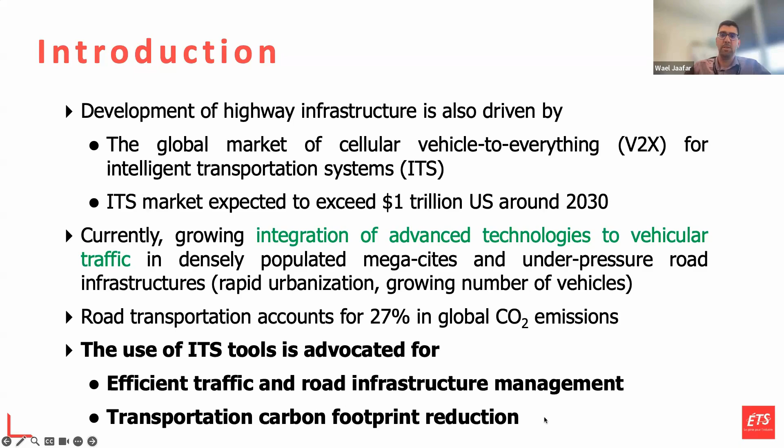And of course, we have this problem: road transportation accounts for 27% in global CO2 emissions. So the use of these ITS tools is really important, and it has to look to optimize traffic and road infrastructure management, and of course, we want to reduce the carbon footprint. So to give you an idea about how these things have been developing.

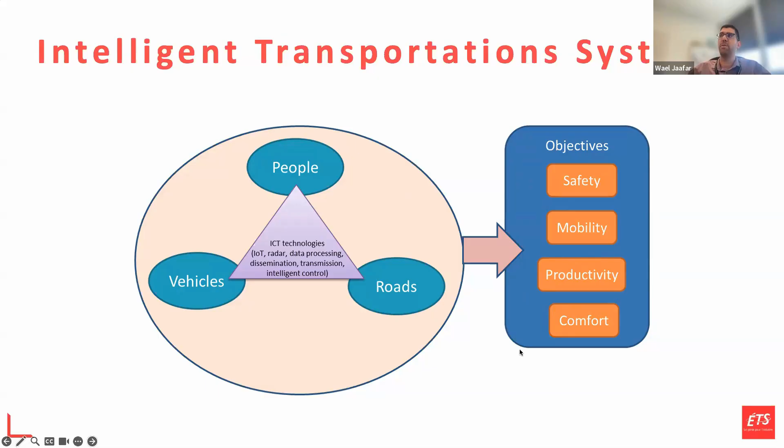At first, we have this intelligent transportation system that has been looking into people, vehicles, and roads, and how this all converges together through technology. So now we have sensors, IoT, radar, data processing that can even be on board, transmission of information in real time, and intelligent control. And usually the objectives we were looking at with ITS are safety, mobility, productivity, and comfort. These are the four objectives we want to achieve. But of course, we cannot achieve them all at once.

For example, in urban areas you have one advantage: you might have cellular infrastructure, which allows V2X communication. You have cellular base stations and roadside units that are very helpful. And in urban areas, the most important thing is productivity. We want our trucks, when they go from point A to point B, to be as fast and eco-friendly as possible, consuming less gas, etc. If it's an electric car, we want to take the shortest road in order to save energy for the next trip. So productivity is the main thing.

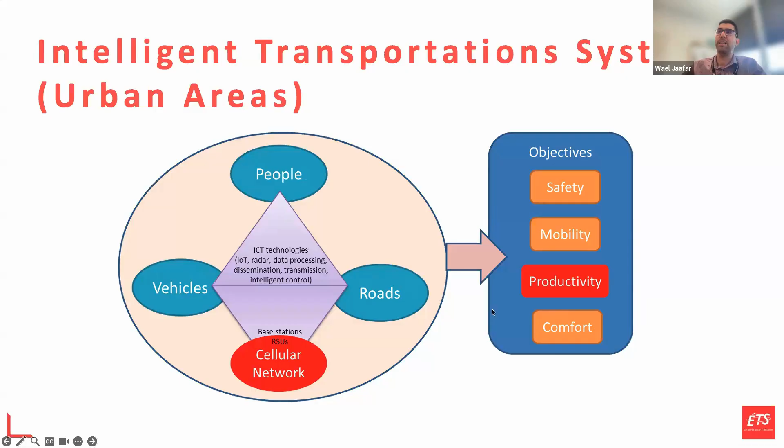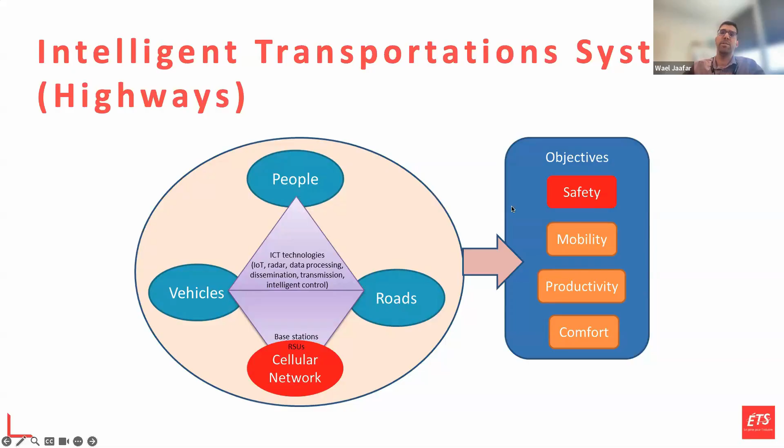But if you go outside these big centers onto highways, it changes, because now it's not about productivity, it's mainly about safety. Of course, the other ones are still there, but safety comes first. Why? Because on highways, cars run very fast, and any alteration, any change in the highway can be problematic and can jeopardize the whole trip. So this is the difference between these two.

In transcontinental highways, to be specific, we have other problems. The cellular network that we mentioned is not there, because many segments of the highways are not covered by any network. Think of mountain areas, of areas between cities. For example, going from Montreal to Ottawa, at some point in your trip you will lose all cellular connectivity. And it's funny, how come you're traveling from one city to another and in the middle there is no coverage, we have coverage holes. So it's really a big problem, and such problems cannot allow sustainable intelligent transportation services.

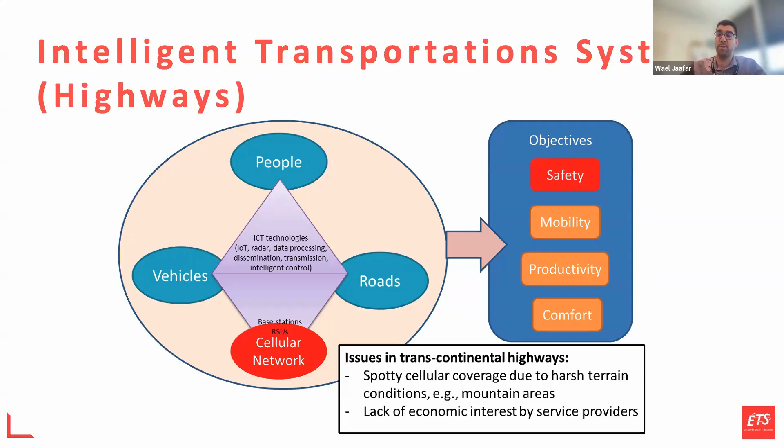And of course, why is it like that? Simply because between Montreal and Ottawa, there is no one living there. Or if there is someone living there, the number is so small that it's not revenue generating for operators, so they won't deploy infrastructure there. That's one part of this connectivity problem. The other thing is about the development of ITS.

Level 2 is partial automation, meaning that you still need a driver, but you have some automation. For example, when you are on a highway, the automation will keep you in your lane. It won't let you steer to the right or left if you did not, for example, put on your turn signal saying you will change lanes.

Or actually, if the sensors or the cameras see cars next to you in your dead angle, it won't let you do it again. So it's partial automation. And then you have level 3, which is conditional automation, which is eyes off, meaning that the driver is not always mandatory for driving.

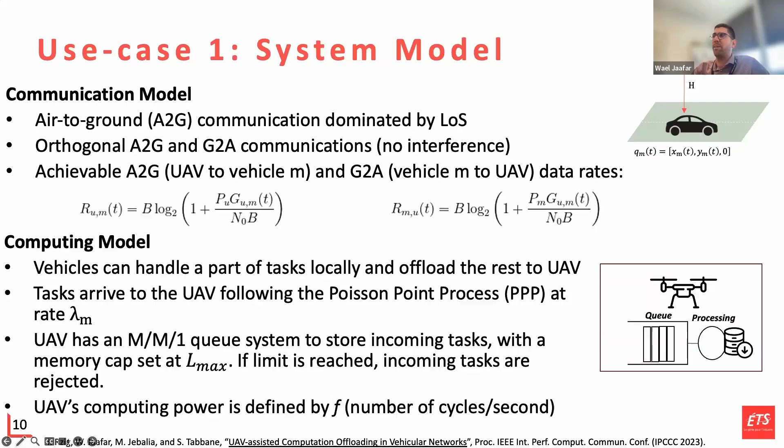Then we looked into the energy consumption. Of course, it's important because a drone has very limited energy. For energy consumption, you have some energy for flying. When you fly the UAV, actually you consume a lot. And then you have task processing. When you process a task, you will also use some energy. There is a third one that I did not show here, which is the communication. Once I'm giving back the feedback, I will transmit something. But usually this transmission is 1% to 10% of what is used for flying and processing. So usually you will just neglect it because it's less than 10%. So in this case, we just accounted for these two.

And in parallel to that, you have to look at the delay. So why are we looking at the delay? Because if I want to offload the task and execute it, I have to make sure that I'm respecting the quality of service requirement that has been given to me. So in this case, we will calculate the delay between the vehicle, the CAV, and the drone. Here, the formula is not like the basic Shannon formula, because since both are moving, the channel is changing. So to have a better idea about the delay, you have to account for this change, since time is discrete here, from one time slot to another.

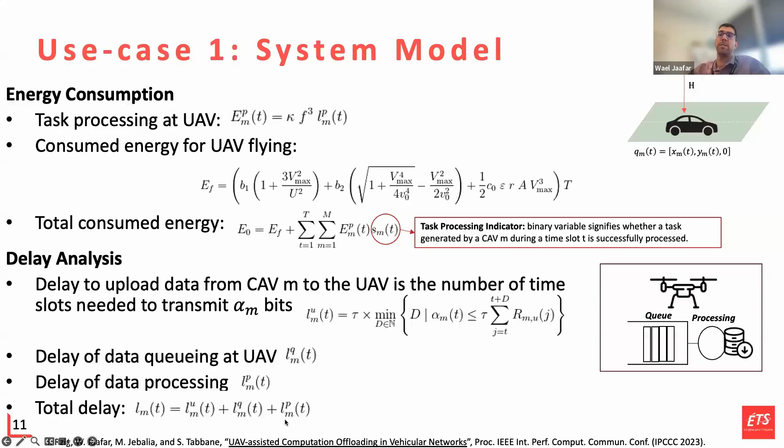And then, of course, you might have queuing delay. We will also account for data processing delay. And the total delay will look as a summation of the three: communication, queuing, and processing. This is the main delay expression here.

So we formulate the problem. Here, the problem is to maximize task offloading success at the drone. So whenever I'm getting a task, I want to make sure that I'm satisfying the maximum number of the tasks I'm receiving. Of course, the constraint will be related to the quality of service. So task offloading delay is actually the tolerated time end-to-end, including communication and processing. Of course, energy consumption also has to be respected based on the battery capacity that you have in the drone.

And what we did here is that, since I told you we have our drone that once it's launched, it will just target a segment in the highway and make a trajectory of come and go all the time, then we have to limit the locations of flying the drone. So in the optimization variables, we'll have the drone launch location and the flying direction. And of course, we have to account for successful tasks.

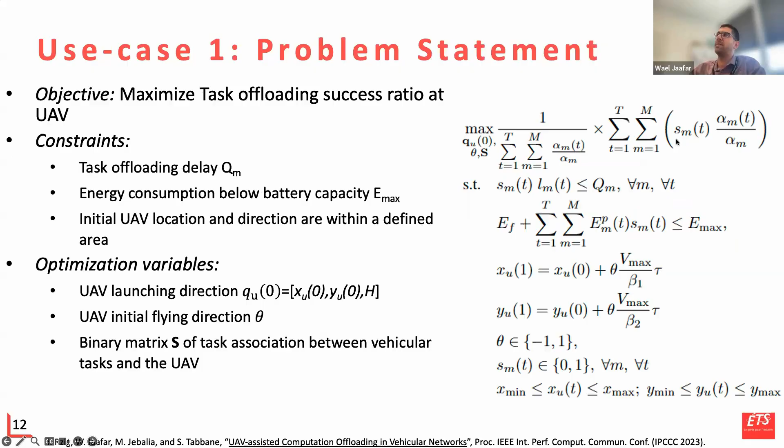We defined the fitness function, which is related to the objective function that we have here, which is actually maximizing the success ratio. So the SMT is a binary variable that tells you whether this task M has been satisfied or not. And then we use, of course, mutations and elitism in the genetic algorithm to try to find the best solution possible. And then we considered another one, which is better because it transforms a part of the problem into a linear program.

So actually, what we did is that we said, since we have many parameters to optimize, let's fix some of them and try to solve the other problems. So for example, if we fix the initial location and the targeted tasks that we want to satisfy, we can just decide on the initial direction of flying. It's either left or right. That's it. Then if we fix this left or right, and also what we aim for as successful tasks, we can find the best location to launch the drone.

And the third sub-problem is that we fix the launch location and the first direction. In this case, the problem becomes either we accept or reject tasks. We accept them, meaning we guarantee the quality of service, or we reject them because we will be unable to satisfy it. And in this case, the problem becomes a linear program, and we can solve it with tools like CVX or AMPL. So this approach is called iterative exhaustive linear programming.

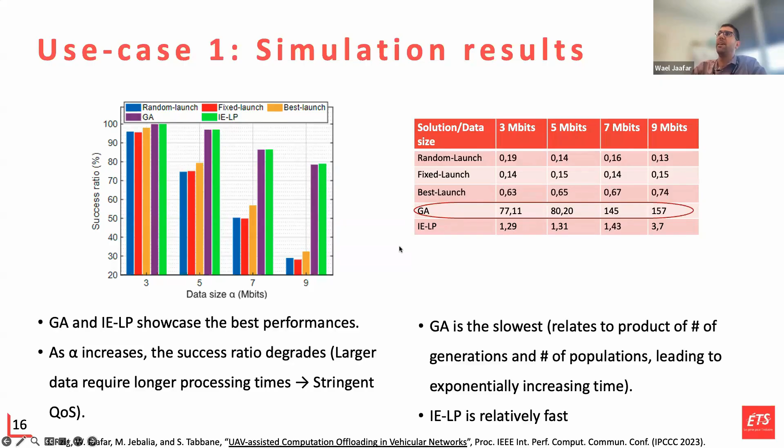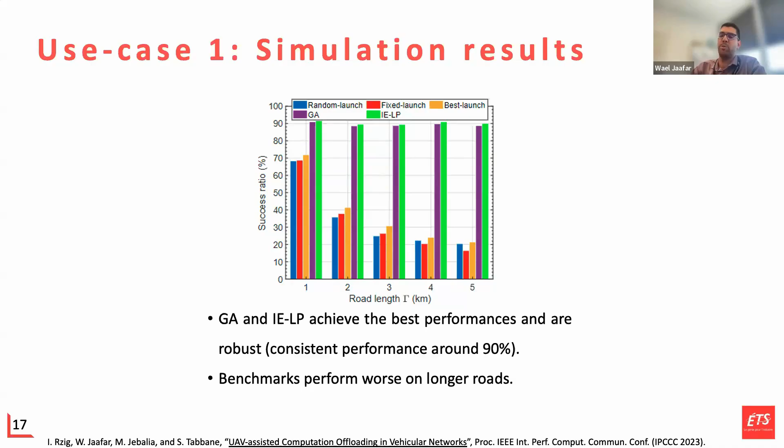So that was the first example where we explored that using one drone. So what we did in the next work is that we said, okay, now let's consider a more complex system. Now consider we have many drones, but also we have the HAPS, because we want to bring this additional edge computing power that comes with a higher payload for the HAPS.

So here, slightly different. The drones are not moving. We consider that they are hovering in some locations. And to make it simple, these locations are chosen such that coverage is not overlapping. So they might be close, but not overlapping. And we have enough drones to cover our highway segment. And then we have a HAPS somewhere at 20 kilometers that will cover all of them.

And of course, this is the system model, how it looks like. But then we have to redefine all the communication model, computing model, etc. So here, I'm not going too much into the details, but what I'm going to highlight is that the air-to-ground link between vehicles and drones is slightly different from drones to drones and drones to HAPS.

So actually, the drones to vehicles, we would say most of the time, it's dominated by line of sight. But in reality, it doesn't mean it's 100% line of sight. It's not. It has also non-line of sight components. So in this case, we use the probabilistic channel model, where I actually have a probability of line of sight and probability of non-line of sight.

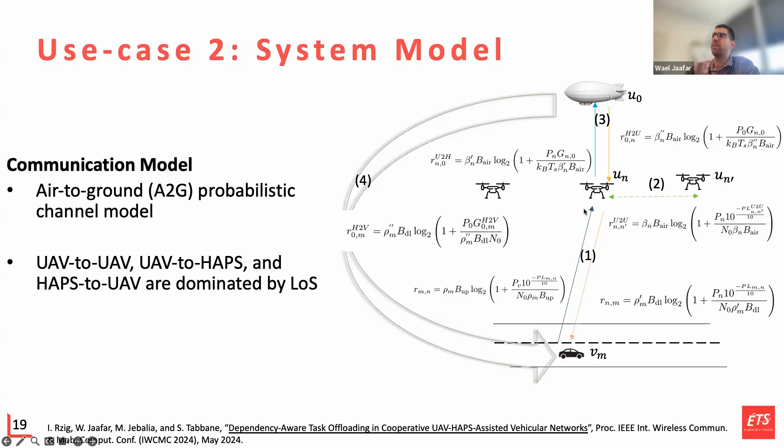So we don't want them to overlap, because we don't want, for example, communication between the drone and another drone or a HAPS to interfere with the communication coming from the vehicle. So this is also an important point that has been considered. So we assumed it's different bandwidths.

And another complexity we have also considered is that rather than having one full task, the tasks are divided into subtasks. For example, WM is one task, and it is composed of subtasks, WM1 to WMK. But there is a trick here: how is this set of subtasks linked together? The simple case, it's linear. So to satisfy my task, I have to satisfy in this order subtask 1, 2, 3, and 4.

It might be parallel, meaning that subtask 1, 2, 3 can be done in parallel, but then once we have the output, it goes to task 4, and then it's done. Or it can be hybrid. So some of them can be parallel, some of them can be in series or linear like this. So this makes it a little bit tricky, because now you cannot, for example, satisfy subtask 4 if you don't get the outcome of these subtasks.

And to make this even more complex, these subtasks can be offloaded to any node in our platform, either to one drone, to many drones, or to some drones and the HAPS itself, which makes it a little bit more complex. In this case, we define a matrix in order to say if a subtask would be assigned to a given HAPS or drone or not.

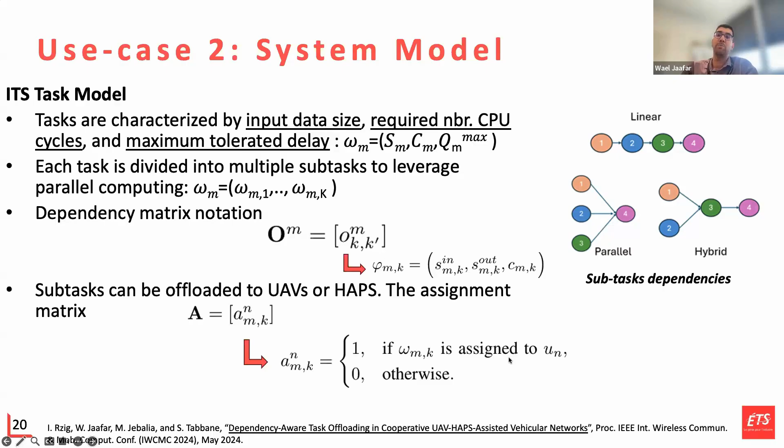So given this, the delay analysis becomes more complex. So here, I've tried to go simply about it: when we have subtasks, now we have to uplink. We have to send these subtasks to different drones. To do that, we have to already know the dependency between them. So if subtask 2 has to wait for the execution of subtask 1, we have to account for it. So this is the dependency time.

And then when we execute, meaning that we process a subtask by our CPU, this time will be accounted also in parallel with the dependency time in order to have the subtask end time. Of course, you have waiting time, because sometimes you have to wait for all the subtasks to be achieved in order to calculate your total, let's say, end-to-end offloading.

So I won't go through all of it, but to give you an idea, the completion of one task is dictated by the completion of the slowest subtask. And the slowest one usually is the one that depends on other ones before. That's how it is.

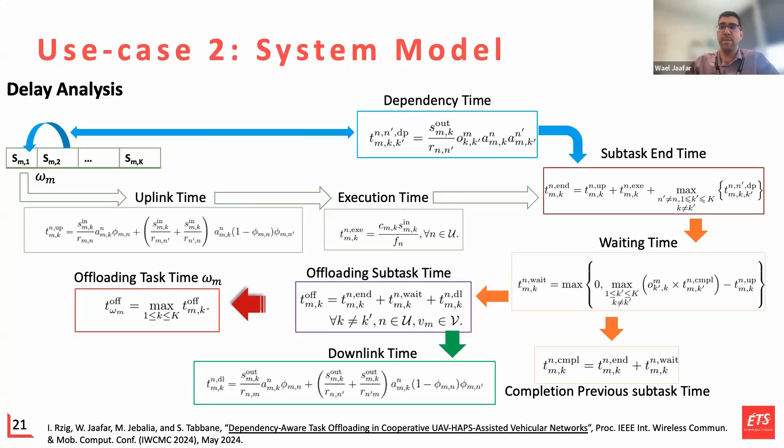So once we have our delay analysis achieved for our subtasks, we have to calculate the energy consumption. Again, here it's fragmented because now energy consumption is related to these subtasks, to where these subtasks are placed. If to process subtask number 2, I need to receive subtask number 1 from another drone or from the HAPS, I have to account for this additional transmission delay that comes from the other drone.

Of course, if we are in the same drone, you can consider the transmission between the output of subtask 1 to subtask 2 is 0 because they are in the same place. But once they are not in the same place, then you have to account for this additional transmission.

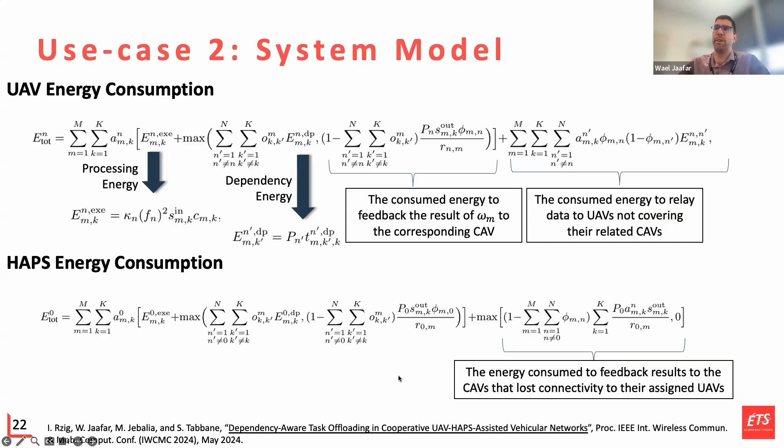So now with all this information, we formulate a new problem. The problem is slightly different from the previous one. So here we want to maximize task offloading ratio, but also we want to preserve our system energy. So residual energy of the drones and the HAPS, we want to preserve as much of it. So in this case, we want to maximize success rate and also the residual energy. So we considered this as combined objectives.

And of course, in terms of constraints, you always have the delay for executing the tasks. You have also now energy consumption at drones and at the HAPS. And of course, here you have energy consumption per drone or HAPS. So actually, when you see N here, 0 is the HAPS, and 1 to N are the drones that you have. And of course, the total energy, we want it also to be less than the available energy of all the aerial platforms that we are using.

And then you have, of course, these constraints that are related to assignments. So we don't want to assign a subtask more than once to someone. And this is the binary nature. So in this case, you see that our optimization variables are subtask associations, which is the A between them. And the ξ here is about the success ratio. So you put it 1 if it's successful, or 0 if it's not successful offloading.

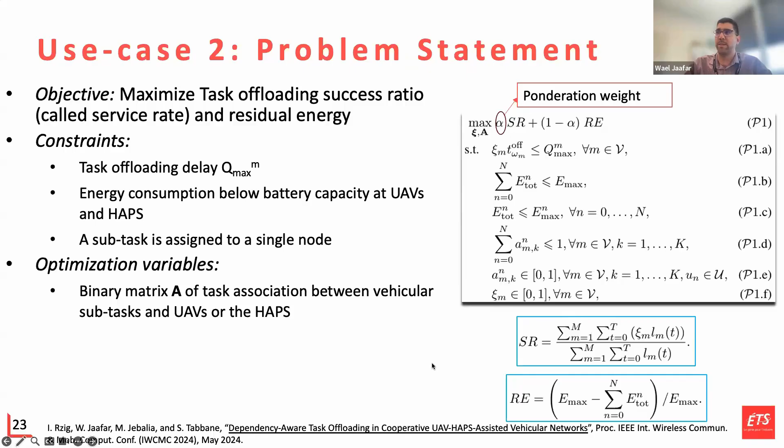And here to normalize these two objectives, we have used this formula. So success ratio is normalized by the total number of tasks that have been generated in the system. And then the residual energy is normalized over the available total energy of the whole system. So again, we used genetic algorithm here, so I won't go through it again. We just adapted it to our new problem, and we made some simulations.

Here benchmarks are slightly different. So we consider the case of full local, meaning that the vehicle is offloading all the tasks only to the drone that is covering it. Random offloading, meaning we just offload the subtasks randomly between drones and HAPS.

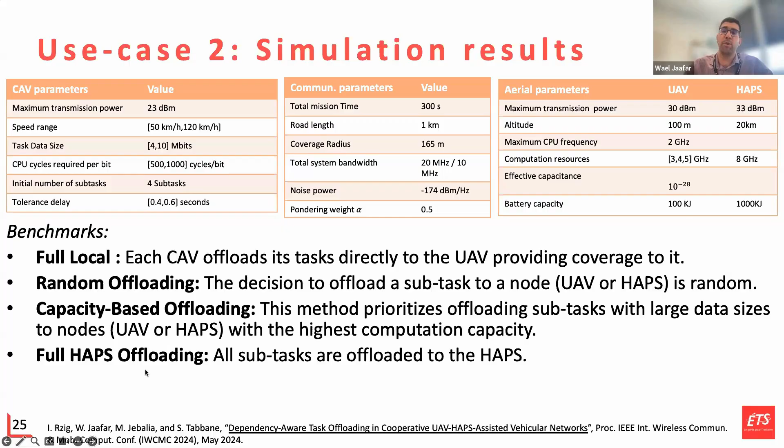Capacity-based offloading is really to prioritize offloading subtasks with large data size to the nodes with the highest computation capacity. So we look to the computation capacity and say, okay, those ones go here, the other ones go here. And full HAPS offloading is really, we rely only on the HAPS for all offloading.

And results are interesting. So actually fully local is the worst one. Fully local meaning that you're just using one drone that does not have a lot of energy, so at the end it will not satisfy many tasks. Random is slightly better. Why? Because at some point randomly you will put some tasks maybe in the HAPS, and the HAPS has enough processing power, so it will be fine.

And then you have full HAPS. Full HAPS is good, and it's understandable again because HAPS has huge coverage, so it's covering everyone, and at the same time it has a good payload for processing. But then you have capacity-based, meaning you look into the available processing capacity and then you assign. It's doing better, but still it's just 70% here.

And then when we solve the problem with genetic algorithm, we're getting something probably near optimal, so we get up to 80%. And here we have different profiles for traffic: low, medium, and high. Of course, as the traffic is higher, we will lose some service rate, but it is understandable. And in all cases, genetic algorithm is providing the best performance.

In this case, we looked also at energy consumption. As you can see here, full HAPS is the worst because you're consuming all the energy that you have in the HAPS, which is a lot. And then you see the genetic algorithm approach is not so bad. Actually, it's very close to the full local. So it's as if you are consuming as much energy as putting everything on one drone and still doing a lot better in terms of performance. So in low traffic, it looks really great.

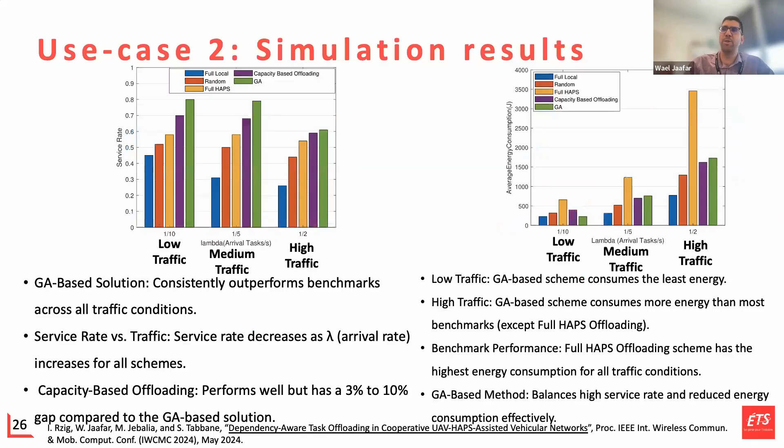And another case where we transpose service rate with energy consumption, where we consider the different models for the subtasks. You remember it's either linear, parallel, or hybrid. And just to tell you, in the previous one it was all hybrid. And here we can see the profiles for the different approaches.

So at the end, you can see the relation, for example, for the genetic algorithm that is giving the best performance in terms of service rate, and it's maybe the second best in energy consumption after full local. Here, same thing, best performance in service rate, second best in energy consumption, same case in the third one. So the genetic algorithm approach is still robust against using different subtask modeling.

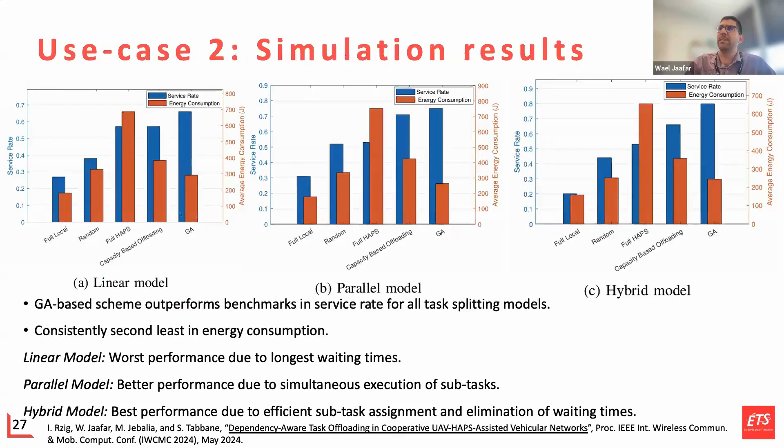For these transmissions, usually you will use active antennas, right? So you will consume some power to do it. So we said, can we do better? Rather than having this energy consumption in the communications between drones, and drone and HAPS, can we use another technology that is passive or lower consuming? And this is what we did.

We said reconfigurable intelligent surface is a great option because the reconfigurable intelligent surface can be passive and will not consume a lot of energy in relaying, because we are considering the relaying case here. So we leveraged reconfigurable intelligent surface. For those of you who don't know what RIS is, RIS is a sort of metamaterial surface that allows you to control incident signals, to reflect them.

So actually I'm saying reflection, but it's reflection not like a mirror, even beyond, in a controllable way. So you can control the angle that you will reflect your signal to. And this property, we have explored this before.

So I'm showing here just a small introduction, because since 2021 we were one of the first groups that has proposed using these RIS on aerial platforms. And actually, we looked into the feasibility of using RIS on drones and using RIS also on HAPS, and how it can work and if it's achievable. And of course, the answer is yes, it is possible.

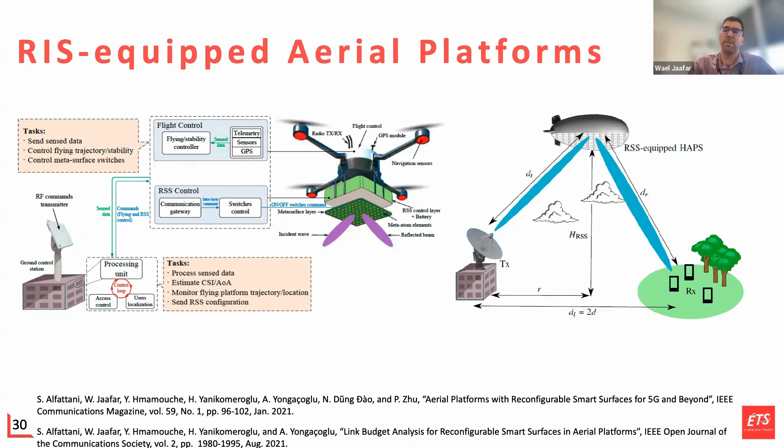And now we see many people talking about RIS-equipped UAVs or RIS-equipped HAPS or even RIS-equipped satellites. So this is something that we initiated a few years back, and it had a lot of success. And actually, this is what we used here. This is what we considered. So we said, okay, now we have the same system, but our drones are now equipped with RIS.

And actually, we identified 3 modes of operation for the drones. So they have offloading power, so processing power, so they are MEC servers. They can be RIS-based relay, meaning reflecting signals with RIS, or they can use their active antenna for communication or for relaying.

And why we kept the active antenna here? Simply because if I have subtasks distributed in different drones and they are dependent one on the other, I need to transmit the output of this subtask to the other one. And then I don't have the choice but to use an active antenna in this case. So the RIS by itself cannot make active communication. I still need an active antenna to do that. So this is what we considered.

For the rest of the assumptions, they are almost the same as the previous case, so I just skipped them. We considered subtasks, same case. Communication model here, the only change is that we have the RIS considered. So once we have the RIS, now you have another optimization to do, which is to control the RIS. So now, depending on the incoming signal, you have to control the RIS to reflect your signal. And this is something that has been added to our problem.

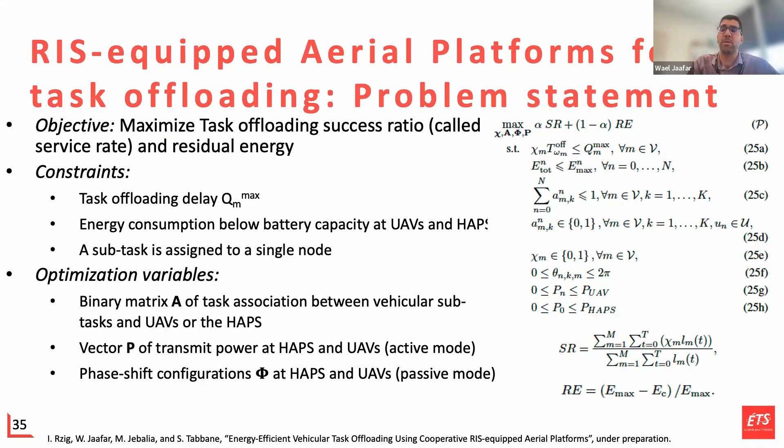Another thing regarding what can be done is that, in our case, we did not focus too much on which frequency band you are using, right? But someone could say, okay, I will check if I can do that with millimeter wave. And I will just go back to the first introduction when I talked about this autonomous driving.

So actually, if you want to get these high data rates, probably you will be looking for millimeter wave technology or something similar, because you want a large bandwidth to get this data rate. So for now, we didn't focus much, but of course, if you need to receive 450 megabits per second or 1 gigabit per second, you should use a higher data rate technology.